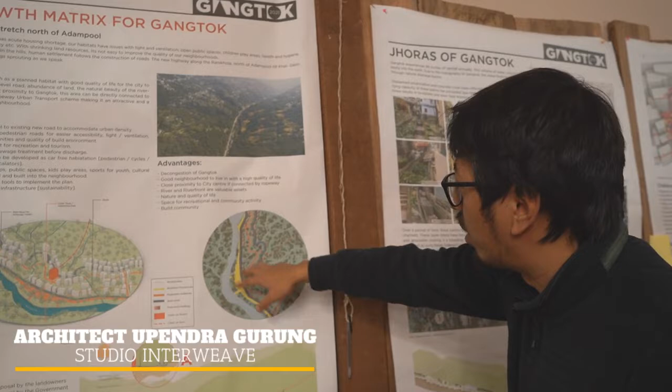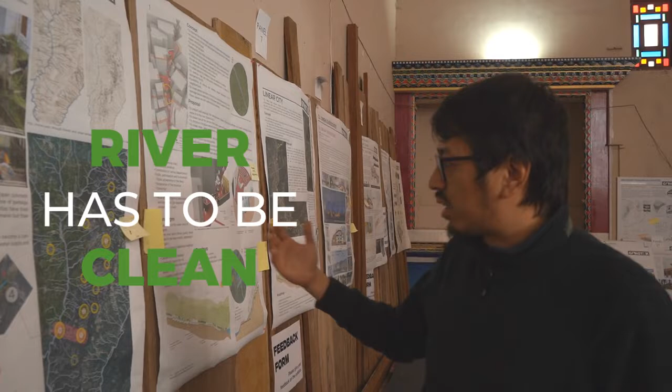So the thing is if you want to develop this stretch over here in Adampool, which is close to the river, along the river actually, we were thinking the river has to be clean. As you can see, most of the Jhoras, this is the watershed of Gangtok, a lot of these Jhoras end up in this river in Gangtok.

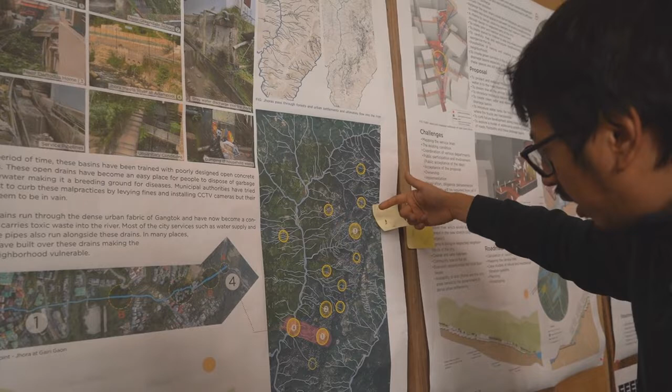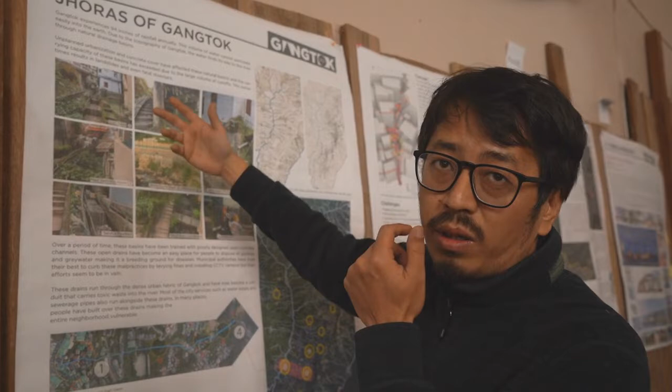And if you see, all these Jhoras also run through a dense urban fabric in Gangtok. What we've seen is because of the concrete cover, so much concrete cover, the runoff has increased over the years. Also in these dense areas, generally the drainage, the Jhoras are open, and that creates a place where it becomes easier for people to throw garbage.

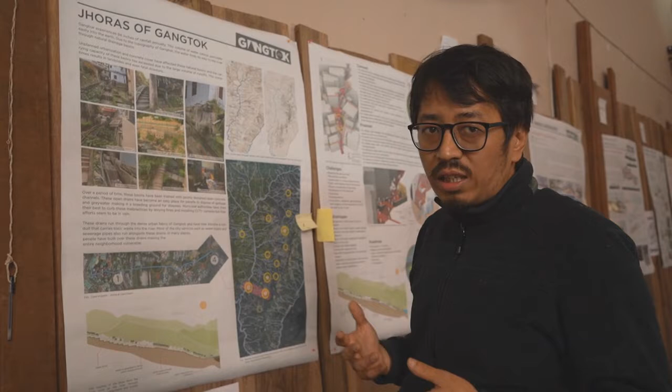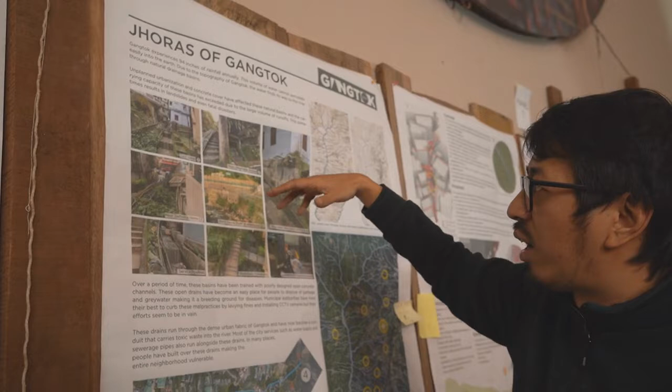Municipalities have tried with CCTV cameras and levying fines, they've tried a lot, even through sensitization on waste management, but their efforts haven't been able to deliver so much. There are a lot of students staying around this area, since I stay here I know this, and the garbage truck comes at 4 o'clock in the morning, which is an odd time for students to get up. So they come out at night and end up throwing the garbage in the Jhora itself.

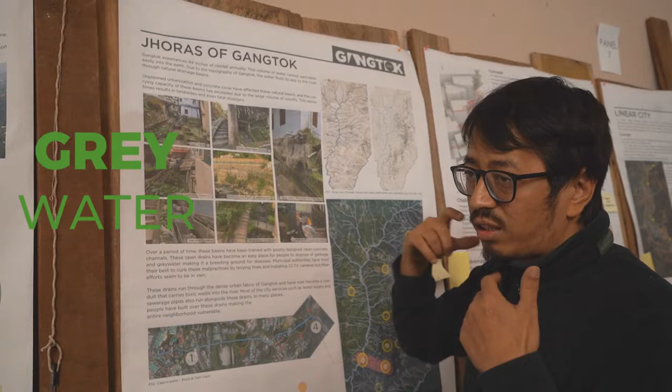Not just that, a lot of grey water from households ends up in the Jhora, and at certain times even the sewerage lines open up into the Jhora. The sad thing is all of that waste comes down to the river.

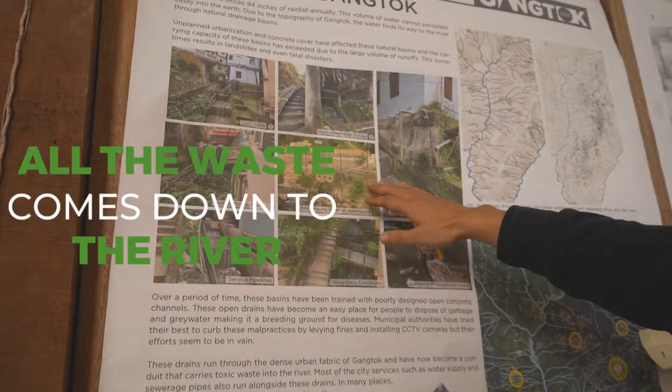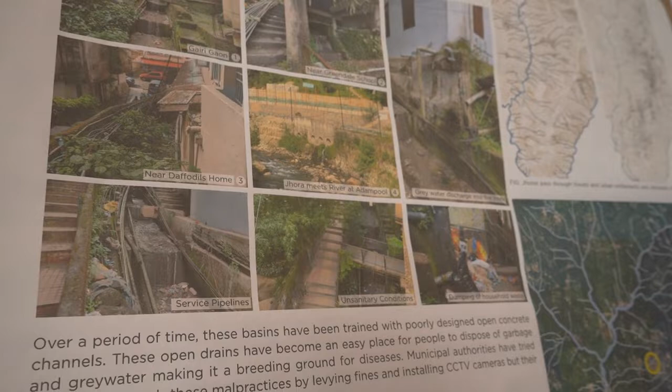If you go down to the stretch, you'll see a lot of the Jhoras end up in the river. In this Jhora there are a lot of service lines running through, and that's the place where garbage gets stuck, and it becomes an environment that's a breeding ground for diseases in some ways.

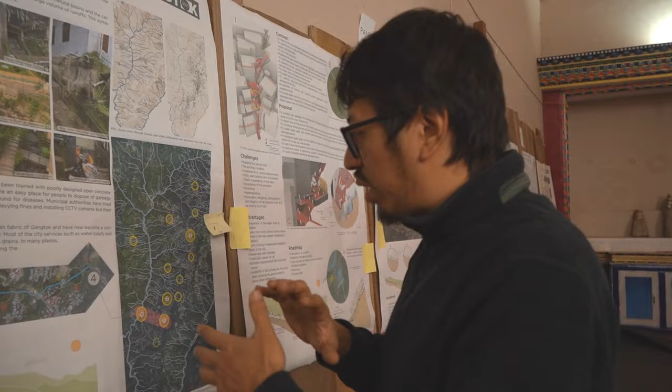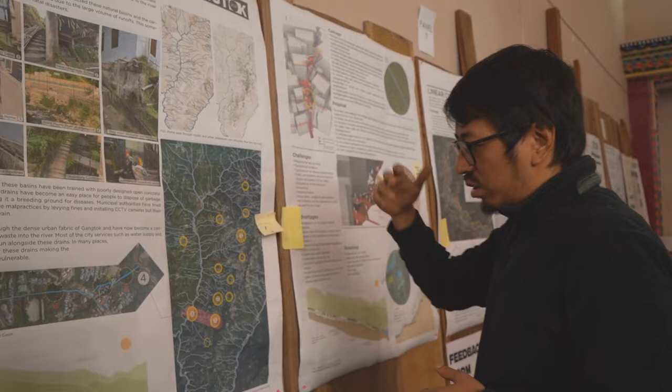So in order to manage this waste, we analyzed the situation and realized that a lot of the waste gets generated in these dense urban areas in Gangtok, where the Jhora runs through the urban fabric. As you can see, there are places it goes through the forest, and it also goes through dense urban agglomeration, and then it comes down to the river.

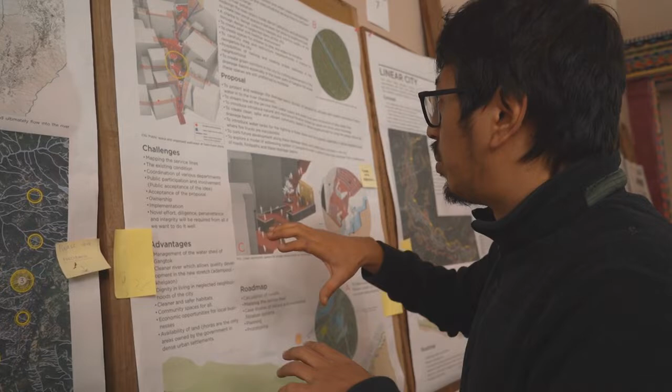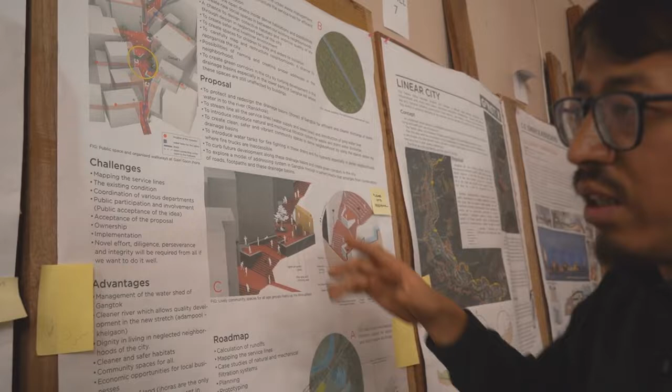So what we were thinking was, in order to discourage people from throwing garbage into the Jhora, especially in the urban area, it'd be a good idea to cover the Jhora. While covering the Jhora, a lot of opportunities open up, because that's the only place where the government actually owns the land, since the rest of the land belongs to private owners.

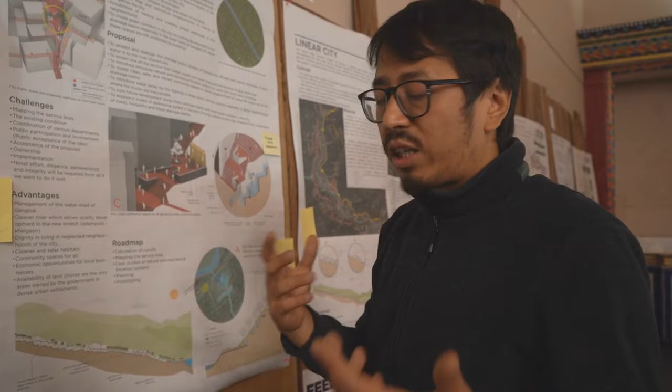So there's an opportunity to create community spaces, opportunities to create spaces for kids. For example, you can create public gyms, have slides for the kids, walls, and also a lot of economic opportunities open up if you have a community space in between.

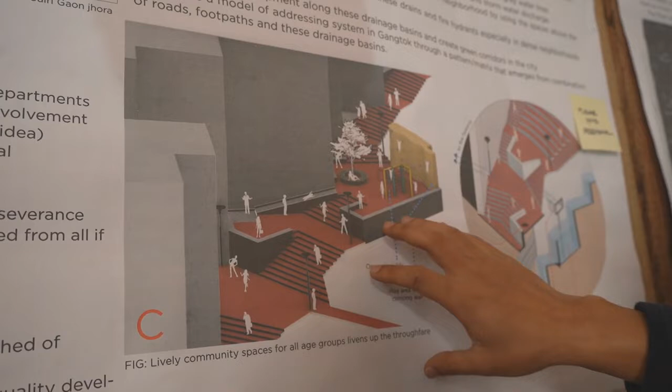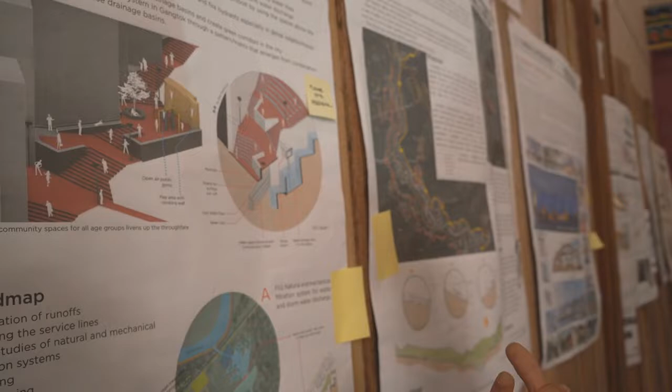But the thing is, we have to be very careful while covering the Jhora, because if we don't take care of what is beneath it, we might end up in a soup. So we have to redesign the Jhoras in some ways, and also streamline all the service lines that are currently going through the Jhora.

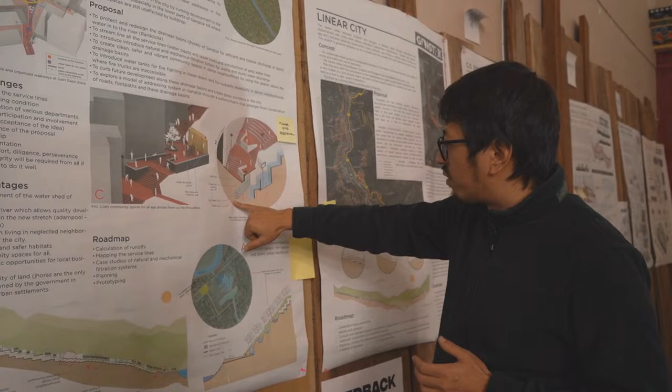First of all, we have to introduce a new wastewater system, which is the grey water, lined up over here. Then we have the sewer line. Then we have water supply, electrical, and all communication cables, which can be accessed by manholes at different places.

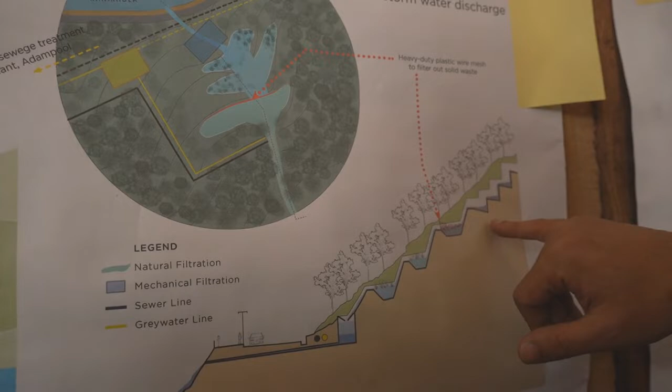Also, if we can redesign the Jhora, because there is a problem of scouring, we were thinking if we can design the Jhora in such a way that the water is always there, so if water is coming from above, it can splash on the water itself. But at the same time, we have to explore the possibilities of seismic shakes, which is when the concrete cracks. So we'll have to find provisions for expansion gaps, and also line the whole Jhora with some flexible material. So that is one thing.

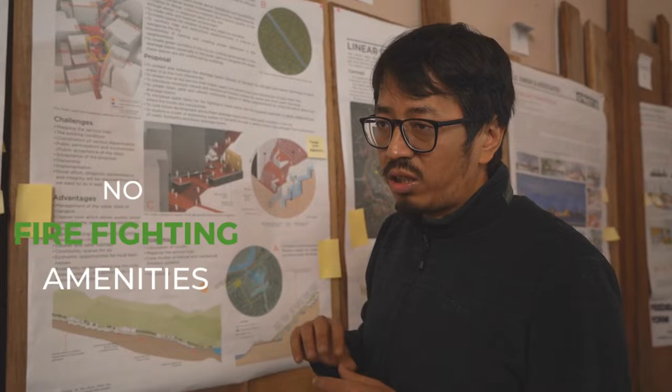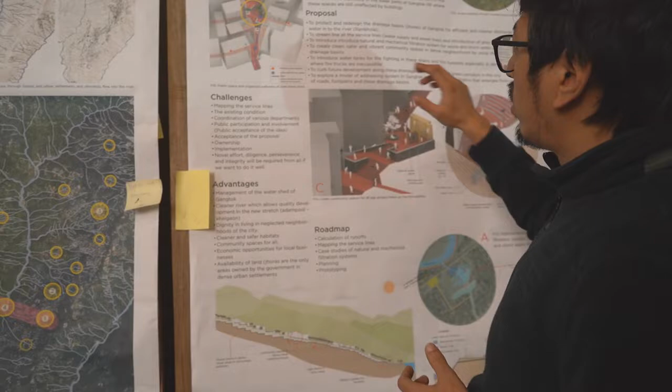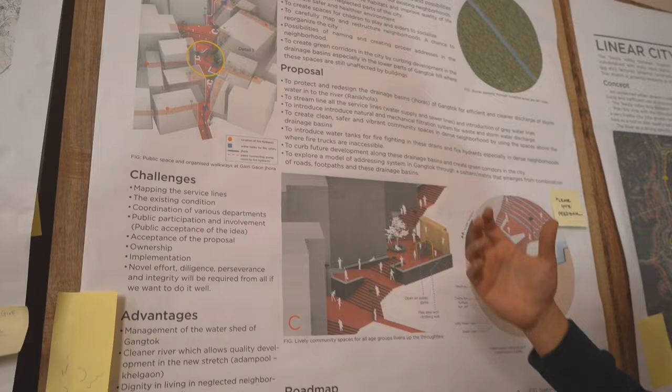Another thing, if you go into the dense urban areas of Gangtok, in the event of a fire there is no way a fire truck can reach the dense inner part of the neighborhoods. So what we were thinking was, since the water is already there, it's just a question of making a nice water tank over there and having a pump room. Then you can have fire hydrant systems in all the dense parts of the neighborhood, which in a way also solves this problem of managing the disaster.

And this Jhora, when it runs through an open area, we're thinking we'll leave it open over here. We don't want to close it in a place where it is covered by vegetation, and also these are the places where garbage does not get generated so much.

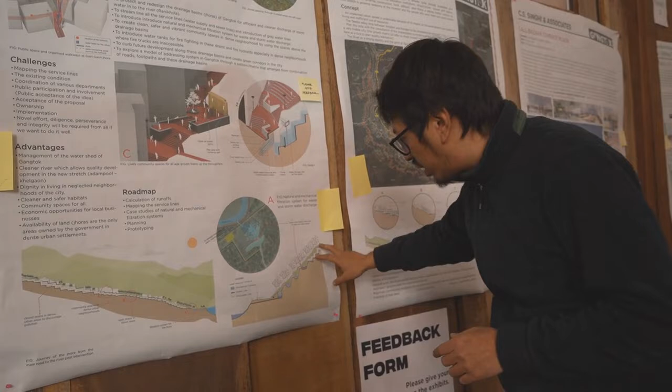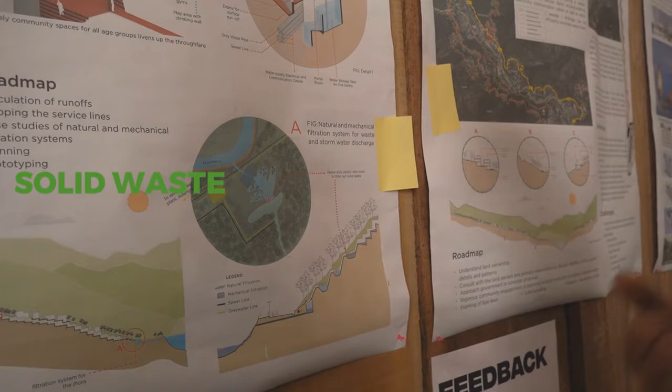And before it goes down to the river, what we've done is propose a very simple filtration system. So it comes down over here, and there are three terraces over here. On the first terrace, we can filter out all the solid waste, including plastics and so on, with the help of a plastic wire mesh, and segregate that.

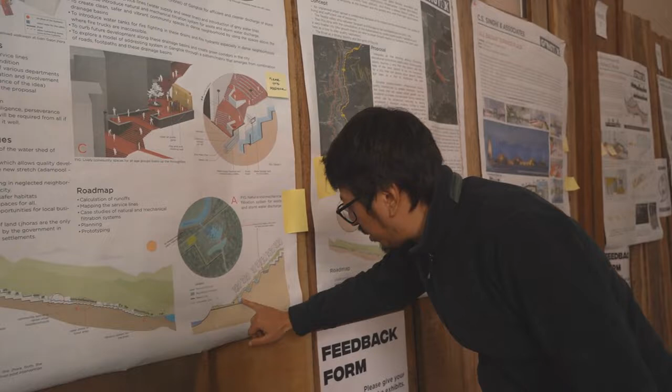Then we can take the waste out, and the remaining water can come down to these two terraces where you have water-based plants which help the filtration through oxygenation, and water plants which help filter it. Then just before it goes down to the river, we can have a mechanical filtration system, and from there the water gets discharged into the river.

That way you have a clean river also, and then there is a possibility of a nice riverfront development on that side. So I think that's it.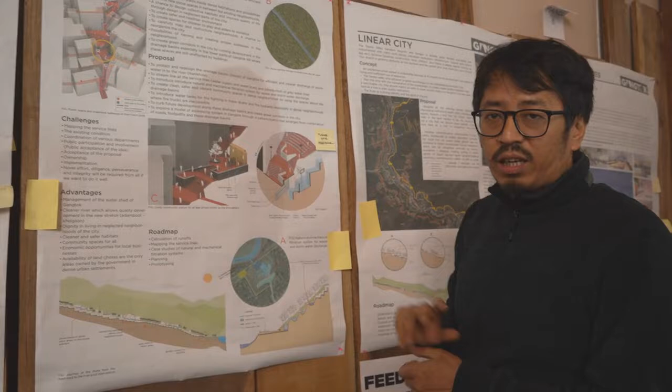But then over here, there are some challenges. The challenges would be to map the existing service lines, and also there is a lot of coordination required between various departments, and this might be a novel effort. So a lot of diligence and dedication is required from all the departments, and if we are to work together, we have to take on this huge task.

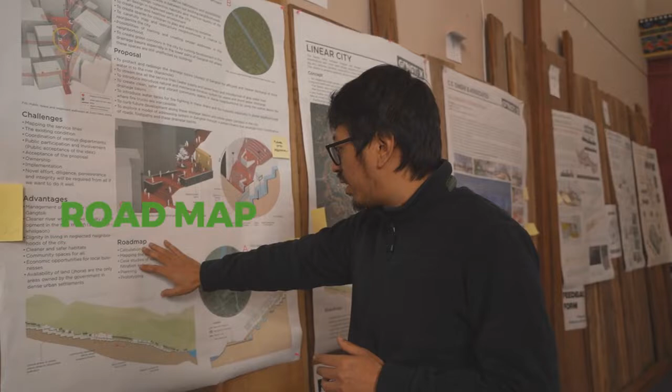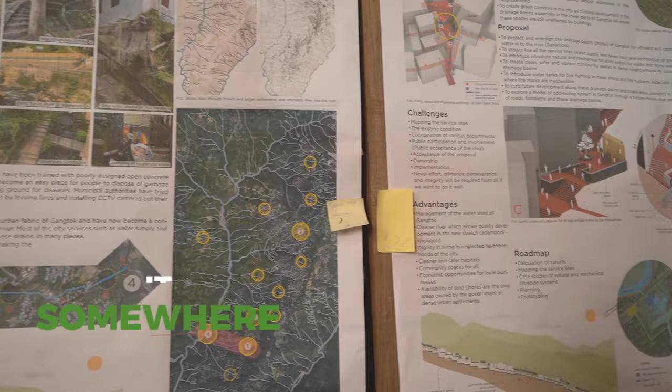And there is a roadmap for the future. One of the things would be to calculate the runoffs, and also if we can prototype it in a particular place and see if it actually works, rather than implementing it everywhere. So that's it for the Jhoras of Gangtok. Thank you.